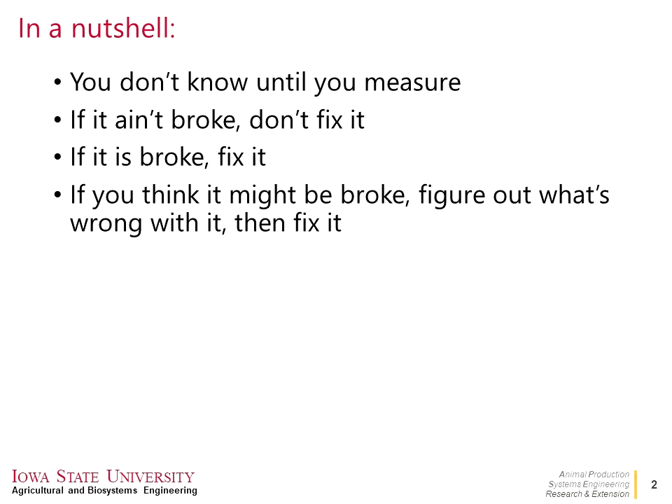So if you're in the barn and you're just kind of standing there, you're like, well, I can't quite tell what's wrong, I don't know, it might be this, it might be that. Well, get on the phone or message, whatever, and figure out, get the right people involved to really figure out what's going on. So this is what I'm really going to focus on right here.

This is for growers. So I say caretakers, people doing chores, people in the barn every day, and we're going to look specifically at practical solutions for the day-to-day problems that are in the barn. Sometimes there are day-to-day problems, and sometimes we never notice a problem for the 20-some-odd years the barn's in place.

So first we're going to really start with how to identify the problem. This is oftentimes a little bit complicated, but then again can be pretty easy. It's pretty obvious to know if your fan's not working, it could just be switched off at the wall, or it literally is broken. But sometimes those are hard problems to identify, and so this is going to aim to go through a little bit of the more complicated problems and how to solve them.

And then the next part we're going to get into is figuring out what are the solutions. Sometimes it is just replacing something, but then sometimes there's more complicated, bigger picture things that are going to take a little more troubleshooting, getting a few people involved to figure out what's wrong.

So why does ventilation in an indoor environment matter? It is probably one of the most critical aspects. It's usually never the sole problem of the system, but it affects just about everything. Thermal comfort, health - it's not going to probably cause pigs to get sick, but it's definitely going to make it worse, and it could also be used to make it better. It could be a stress, as it gets - what are we going to hit, a heat index about 105 down here in Ames this upcoming weekend?

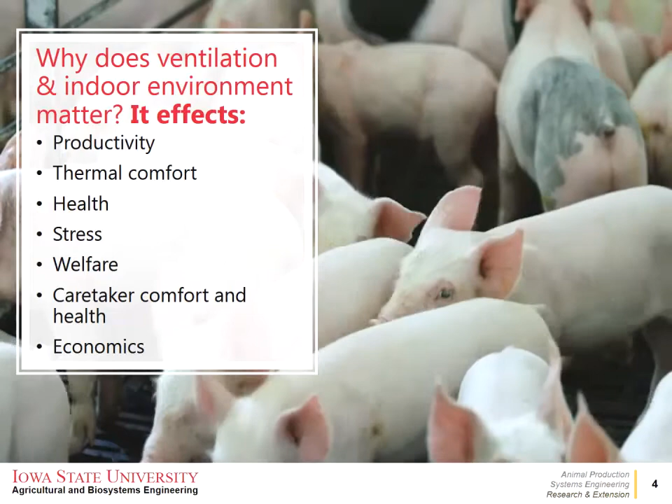That environmental stress becomes a welfare concern, and it's something we want to avoid. It also affects the people in the barn. So the caretaker itself is in the barn, and if it's a bad environment, it's going to be miserable for them. So all the more important to make sure the ventilation is doing what it's supposed to do. And most importantly for growers, it's economics, right? It's propane, it's electricity, it also comes back to productivity, but it's about economics. So it pays to have that ventilation system working correctly and doing what it's supposed to be doing.

So ventilation, what does it look like for most people? It's usually about this word cloud, right? It is just a massive jumble of words that we have heard. We don't know exactly what they always mean, but they're there, they do something for something that we need to make sure they're doing it correctly. But this is kind of the big ones - I just stole this off an article and put it in. This is what shakes out if you read a ventilation article. Not shockingly, ventilation's the biggest word in the article, but a lot of CFMs, pressures, insulation, pig, fan, heat, rate, exchange, facility, gas, shutter, cold barn, static. So it's just a big jumbled mess, and that's really what happens in a lot of people's minds. So what we want to do is clear this up, get simple, accurate definitions for these words so that people understand.

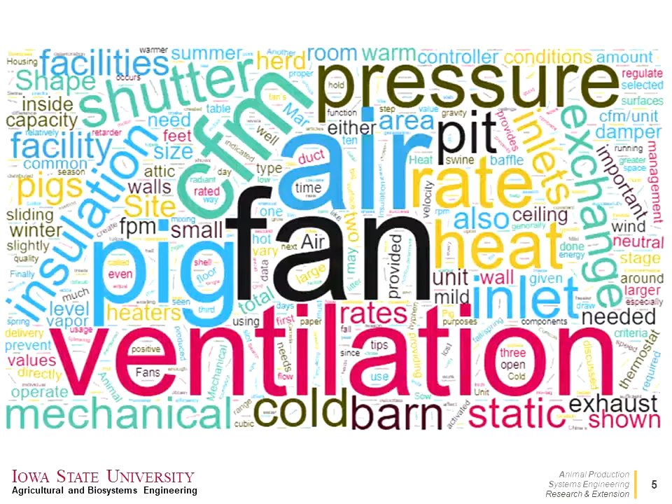So I'm going to introduce the 6 R's of ventilation success. This is the process I see as a methodology to make sure that the ventilation runs smoothly and our problems get fixed with the right solutions.

So the first one, if anybody could guess, is recognize. You got to be able to recognize the problem. That's where the training comes in. That's where coming to things like this, talking to your managers, territory managers, going to the trainings, understanding, taking notes, and really being able to recognize those problems when they come about.

Anybody guess what the next part is? Record, right? You got to make a note of it. If nobody knows or if it never gets written down, how's it ever going to get fixed? So record, write it down, make sure we take notes.

Next one, even though it's an old school telephone, report. You got to tell somebody. Somebody's got to find out. If you're not the one in charge of fixing it, how's it going to get fixed? Make sure you get on the horn, call somebody, and report that issue.

Next one is resolve. With resolve, this is actually making sure it gets done. If it's one of those more complicated problems, it has to get resolved correctly, in a timely manner, and figure out really what's the key underlying problem, and not putting Band-Aids on something that's much bigger.

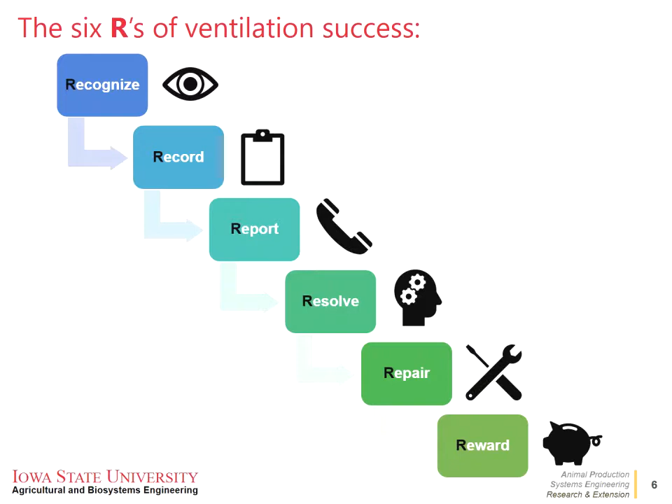Repair, get it done correctly, and then lastly is reward. Going back to what all the environment impacts - productivity, stress, welfare, economics - that's where the reward comes in. It's a big system that ventilation affects all of it. So by getting the process in place to make sure that the ventilation is working correctly, we can really reap the rewards in the system.

So let's go through the first part. Recognize. This is our critical first step. This is the one that requires our training and experience. If you see on the slide, does anybody recognize any issues?

Yeah, see some problems? Let's go through any problem where these are located. They look like a good spot. What's coming? What happens when that brooder's on? Where's all the heat going? Right up to those backup thermostats. So what they probably have done is probably adjusted them for that fact. But again, you got to see that that's a problem, not wondering why everything's being triggered.

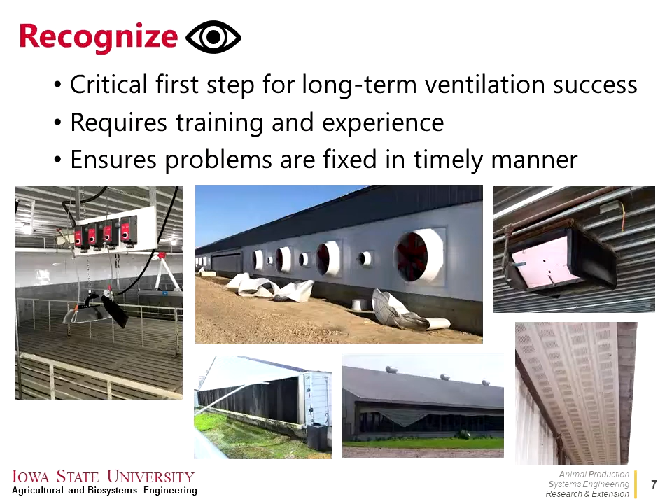Problem here, where's that feed line going? Right through a cool cell. Curtain sagging, are these the right soffits? If you don't know, you got to pay attention, look, and basically on the soffits there's just not enough open area to let air up into the attic. But you got to have the training and the understanding of what is supposed to be done to recognize some of these problems. So it's really starting with here.

How big are my pigs? What's it supposed to be doing? So if you don't have the concept of what my ventilation should be doing, how are you going to know if there's something wrong with it? So it's coming together and kind of putting together what you should be doing.

So I found this quote: you don't know what you don't know. That's where if you really don't know, have something or someone or something that does know. So checklists, standard operating procedures are good ways to just have something in the barn, accessible, that you can use, take with you, walk down the barn, pay attention to ventilation.

I said there might be an app. I don't know if there's a ventilation app yet. Maybe I need to make one. It'd be kind of neat. Just have something to help guide that troubleshooting, something that at least gets you pointed in the right direction quicker, so you can start working on those issues sooner. Those checklists are great. They really help get the season started. They help get through the season, help keep things running smoothly.

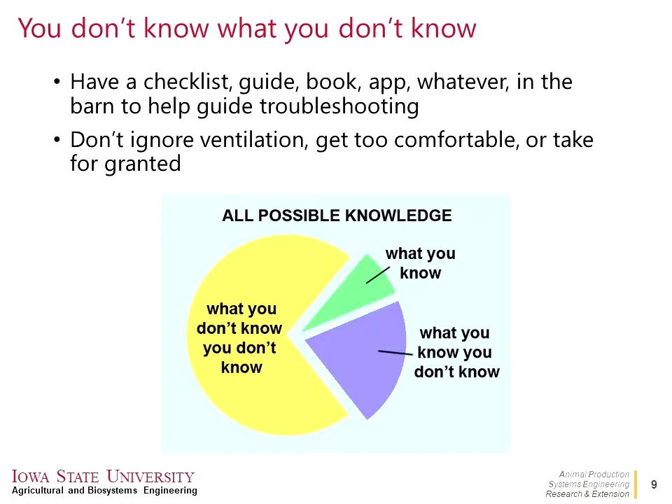So to start, this is kind of the very high-level approach to ventilation: what does it do, what should it do in winter. We have one major goal: remove extra moisture and noxious gases from the barn, generated from pigs, manure, and any combustion from unvented heaters. That's our goal for winter. You get that in your head, use that to start guiding any winter troubleshooting.

Opposite, like today, summer - our goal is generally to remove heat generated by the pigs to maintain a somewhat comfortable indoor temperature, and then we're also going to probably provide some elevated airspeed for cooling, depending on how the ventilation is.

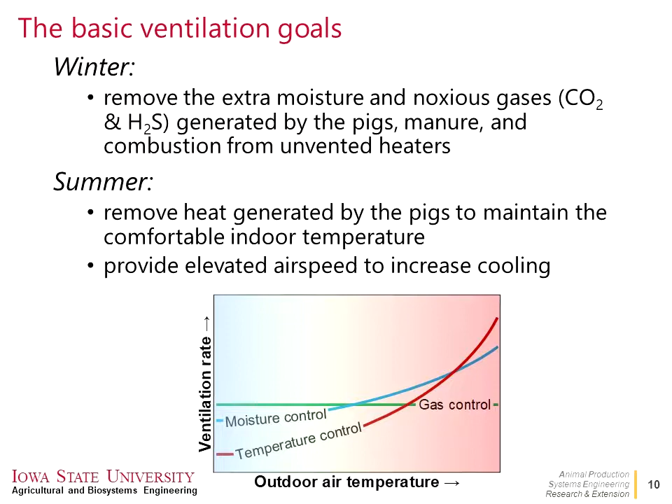So if you look at ventilation and how it goes through the different fan stages, we'll just take this as the rate. As that temperature goes up, we generally ventilate here for moisture. It's usually too expensive to ventilate for gases, and then as it gets warmer, we switch over and start ventilating for temperature. Just kind of the overall view.

So the other thing is separating out the difference between using the design and operation. We use our ventilation graph to size our fans and our number. We're after here to make sure we get everything in place so that when the seasons do come, we have the right amount of capacity to handle those seasons and get the exchange rate we need.

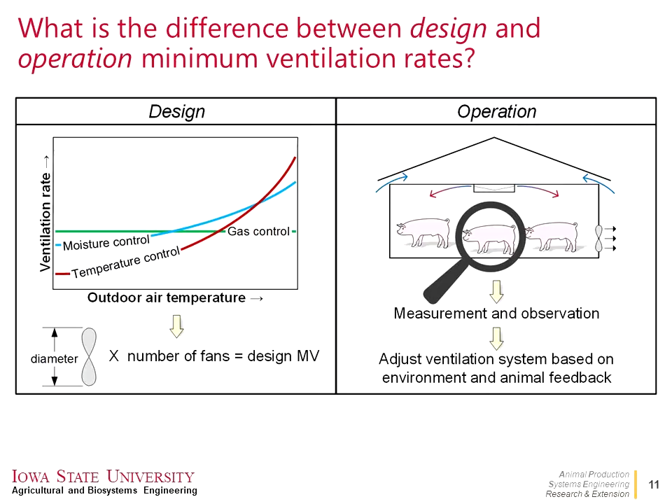Versus an operation, we're really looking at using the pigs and measurements in the barn to make sure we're doing the ventilation that we need. And we can make adjustments to the ventilation system depending on what we find in the barn.

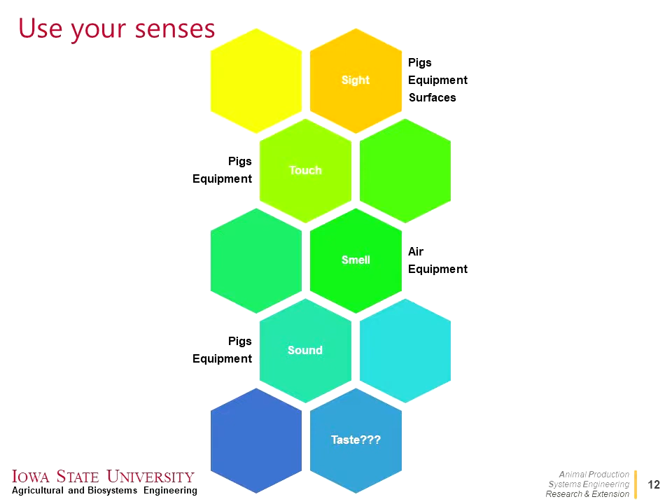So start with the very basic sensor. People are pretty easy sensors - it doesn't take any fancy technology. There's a lot of good that can come from just learning and the experience of using your 5 senses. Well, I got taste on there, but I don't know if I'd recommend licking anything in the barn, and I can't figure out how that relates back to ventilation. But the other ones - sight, touch, smell, and sound - can all be very useful tools to troubleshoot ventilation and figure out what's going on.

So sight, real simply, just look at the pigs. They're a great sensor, and that's where a lot of technology is trying to extract that information right out of the pig to help make our informed decision. As we don't have it yet, we still have our eyes that as we go through the barn, which is maybe only once or twice a day, but we can still use that information quite valuably.

So things like asking yourself, where's the dunging area? Is it in a normal spot? Has it changed? Trying to figure out what is their behavior.

So in times like this, looking at respiration rate, vices, seeing if they're huddling, or probably separating out now because they're getting too warm. So if you just look at behavior alone it can say a lot. In a chilled situation, they're going to start piling - pretty simple to tell that there's drafts, they're too cold, versus here they're too warm, they're trying to spread out. You can see pretty nicely where the brooder's at. Versus when they're comfortable, they're all kind of nice, evenly spaced, in that nice touching, not too close, not too far setup.

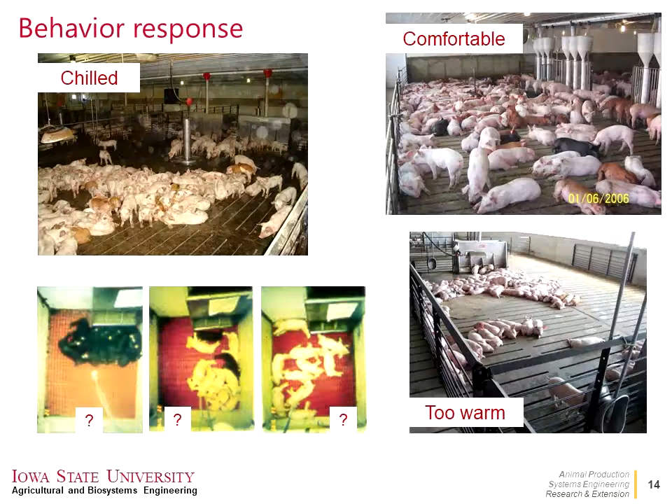So we know - too cold or too hot or comfortable? Too cold, right? What about this one? Too hot, right? So just simple, recognizing the pictures, and when you're looking at the pigs, being able to tell what their comfort is.

Go back to my slide. So equipment - also use your eyes to inspect the equipment. Are the shutters dirty? Is there any obvious issues? Can you see motors out of alignment? Is there noticeable tears, holes, gaps anywhere? Just taking an inspection of ventilation equipment and the pigs rather than just doing the chores. It really takes going through with a ventilation mindset rather than just, I got to get X amount of things done and not pay attention to the surrounding equipment.

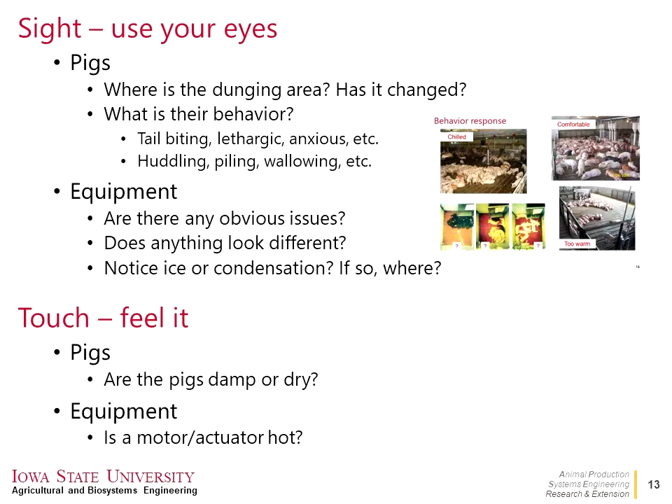So touch - I guess you can touch the pigs to feel if they're damp or dry. Touch motors if they're warm or hot. Just use your hands when you can to be safe about it, but use that to help diagnose.

Smell can be used to check air quality. Does the air smell gassy? Do I notice any air quality issues? Does it all of a sudden smell a little bit more like ammonia, if hopefully you're not desensitized yet? Same with equipment. Do you smell something burning when your fan's on? Is there too much dust? Is the belt worn? Just use the different senses.

Sound: listen for coughing. Are they making a lot of noise? Are they sounding extra anxious than normal? Same with equipment, grinding noises, just very simple things, but just knowing it and attributing it more to ventilation than all the other things going on in the barn.

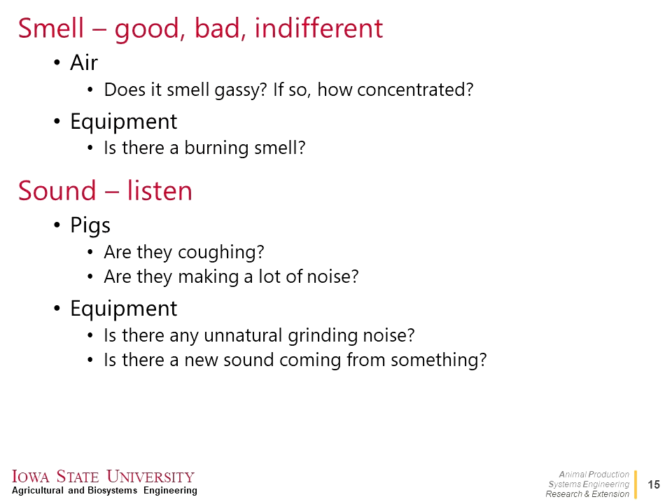So the next step: record. I don't have too much here, just make a note. It would be kind of interesting if they get into more electronic management, finding ways to track repairs, maintenance requests, etc. That way you can actually start to figure out timelines, how long it takes to get fixed, and whether the pigs are possibly not getting the best environment possible if that maintenance isn't recorded.

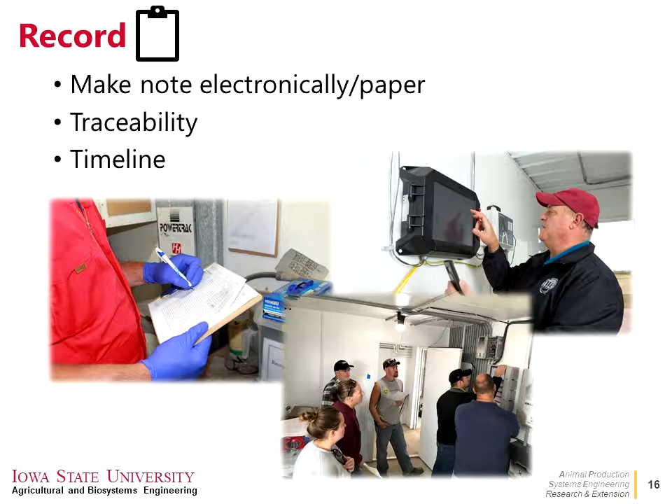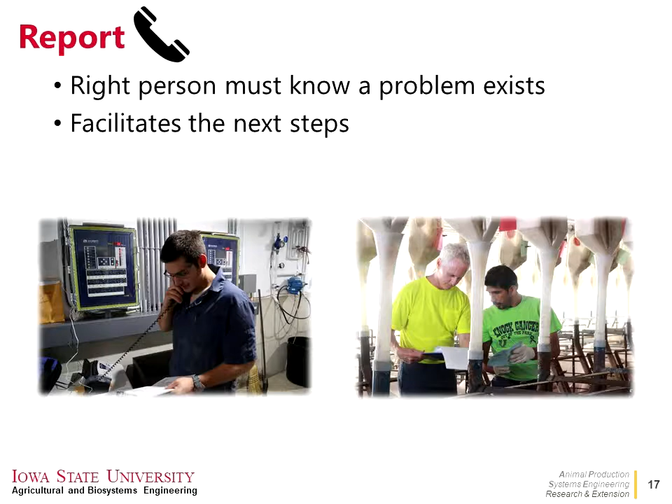Report: the right person must know the problem exists. Just telling your mom isn't going to get it fixed, right? You've got to tell the person who's going to be able to put in the right request, get in the barn, get the equipment ordered, and get things fixed. That really moves the process forward and gets the ball rolling.

So resolve, this one's a little trickier, may or may not be needed. If something just broke, fix it. But if it's something like just not getting the right airspeed at my inlet during the winter, it could be a whole host of other problems: fans, dirty fans, inadequate soffit area, etc. That's usually when you might have to call in other people. It's going to take some troubleshooting, might take some measurements, and get a few brains involved to figure out what's really going wrong and where we can start to fix the system or improve it.

Repair: get it fixed and get it fixed correctly, so not just swapping out for the cheapest motor, making sure it's the right motor that goes in. So if it was brand X at X horsepower, make sure that's the right one that goes back in. Or make sure you adjust your motor curve too when you do it. Paying attention to the repairs and making sure they're going in correctly, using proper techniques and making sure the right things get maintained well, is critical.

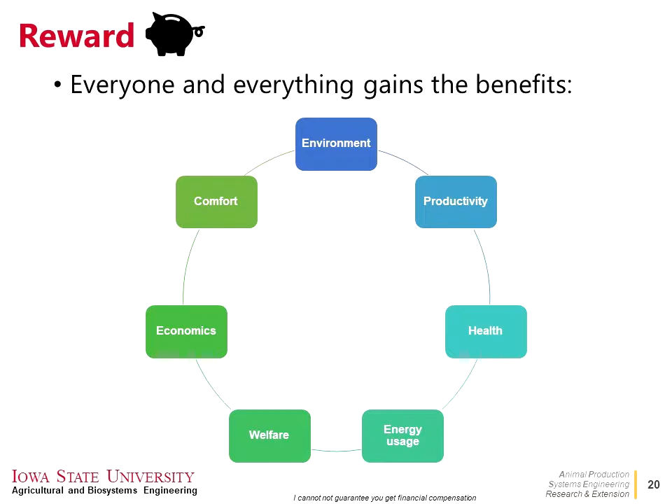Like I said, everybody gets the benefits. It kind of goes back to ventilation touching all aspects of the pigs in the house, from environment, productivity, health, energy usage, welfare, economics, and comfort. It's really hard to put a monetary value on how much a good ventilation system gets you, but I think we know how much a bad ventilation system costs. So it's important to make sure things keep moving smoothly.

Now we're going to focus a little more on specific examples of recognizing and resolving, because these are probably the two main ones we can use every day and actually get some things fixed or improved if we notice we're having problems.

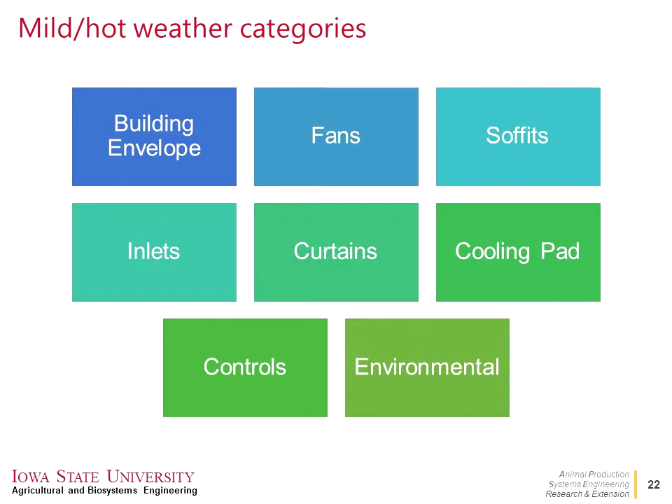I'm going to stick with mild to hot weather, not cold weather, since it's muggy and horrible outside. Here's the main categories if I'm trying to take a look at troubleshooting and improving ventilation: building envelope, fans, soffits, inlets, curtains, cooling pad, my control settings, and then the environment inside the barn — what is the actual environment and what are the pigs doing? These are the categories that would drive my troubleshooting and where my focus areas are going to start, so I want to go through some scenarios to figure out what's critical.

Let's start with a perfect example: my room is just too warm. Very basic — it's just too warm. Maybe it's 90 outside, but my room's 100. Hopefully not, but that's an extreme example. What is it outside? If it's really hot outside, your room's also going to be really hot unless you have a cool cell or something else for cooling. So it's not uncommon for rooms to be warmer — we usually hope to keep them no more than about 4 degrees Fahrenheit above outside. That's usually the guide we use.

Is there wind if you're in a natural barn? What's the air exchange? Going into the controller, do you have the right pig weight entered? If you're off by a couple hundred pounds, it's going to really change the set point. Are the temp sensors accurate and clean? Are they caked with dust and reading off? Have they been calibrated recently? Is there any other nuance — wrong brand used, or are they in the right spot?

If you have multiple in the room, are they all different? Do they vary within a reasonable amount, or are they similar? So for curtains, generally assuming a tunnel barn or natural barn, what are the air speeds at the curtain? What's the rope quality? Is it stretched, is it fraying, does it need to be replaced? Or are there any other issues with the curtain?

The other one is just fans. Can't harp on fans enough, as they're really the primary driver of ventilation. Dirty shutters can reduce airflow by about 20%, so just keep them clean. Wash them when you power wash, keep them dust free. As those things get weighed down, they just cannot move as much air. Especially in times like this, I think an extra 20% on a really hot day can really help some pigs.

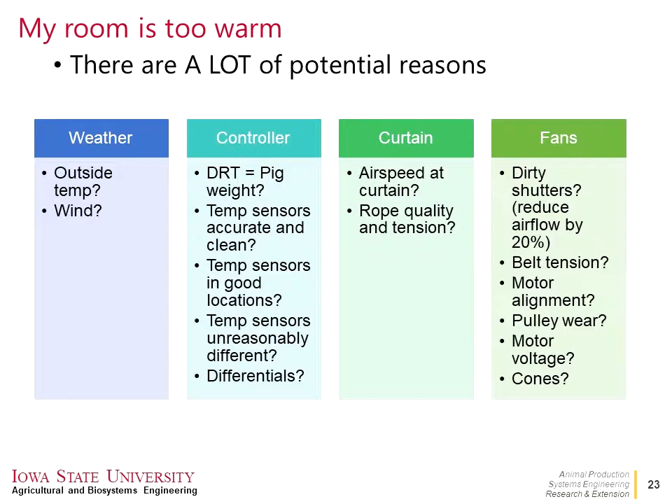Belt tensions, make sure they're kept tight, motor curves, alignments, pulley wear, etc. There's multiple things, but you've got to know that these are things you need to check. So again, having that checklist, having that guide - that's a lot of things to remember if you walk into a barn. So having something tangible and physical with you can really help guide some of this troubleshooting.

So as always, you've got to harp on static pressure and what it means for the ventilation system. It's the primary driver. Our fans pull air out of the building to create a negative pressure, and that's what drives air into the barn. So as pressure goes up, fan flow rate goes down. It's pretty simple, but that's what happens if your building's too choked - if you do the door slam test and that door slams, your pressure's too high, you're probably not getting enough exchange, leading to a warmer room.

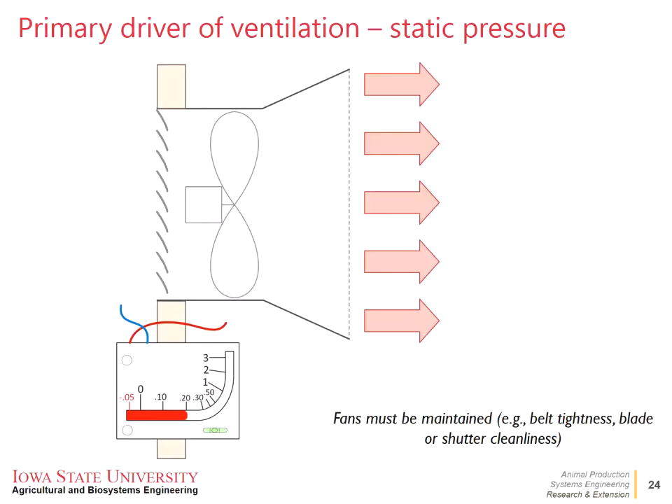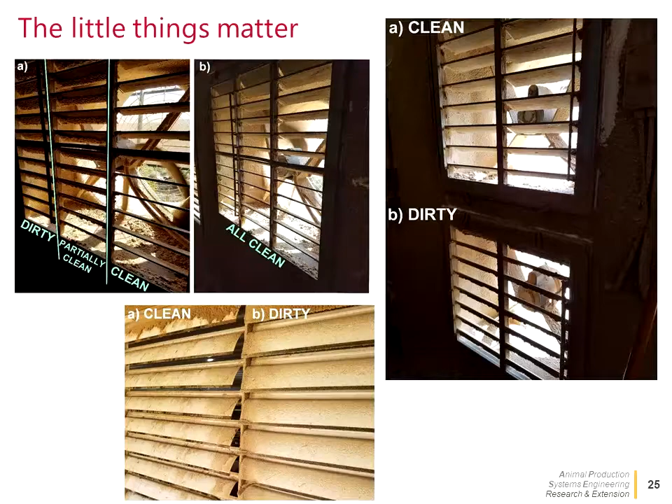But simply, that's it. Going into shutters, here's just some pictures I took when I was cleaning shutters one day. Just looking at how much - this is a really bad case, but it illustrates the point. It probably hadn't been cleaned, but here's a dirty shutter, a moderately cleaned one, and a clean one. You can just tell the difference in the opening and just how much extra weight some wet, dirty dirt sits on those shutters and weighs them down. They took those off, and it made a world of difference in the room. So you can take a slightly smaller fan and see the difference in how much they're open and how much air they're moving.

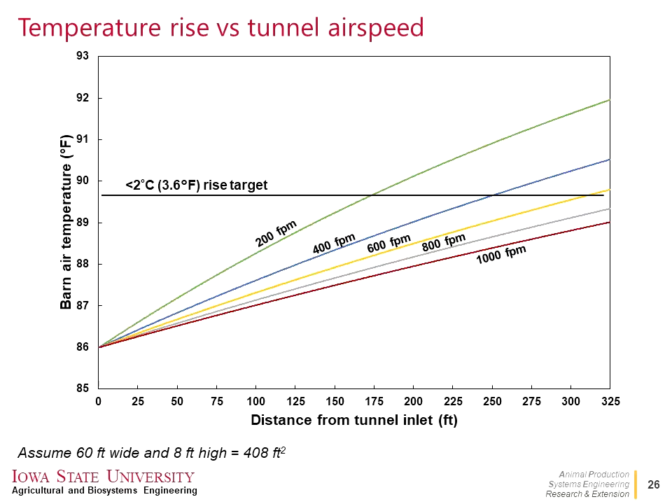So essentially, as the temperature goes up, we have more stages kicking in. Generally, if we're starting with ceiling inlets and then moving over to the tunnel curtain, the amount of actual airspeed inside the room isn't changing a whole lot, so it's kind of slowly going up. Then basically, as that temperature hits right around the skin temperature of the pig, they're going to start getting warmer. If the surrounding temperature is greater than the pig's temperature, heat actually starts to move into the pig. We always have to have a gradient from the pig temperature to the air temperature, or else we start going the wrong direction. So when it's 100 degrees outside, or 95 this weekend, we have to do something extra because it's warmer than the pig, and you're going to be driving heat the other way. So that's why we use sprinklers and other cooling methods to help keep the pigs cool.

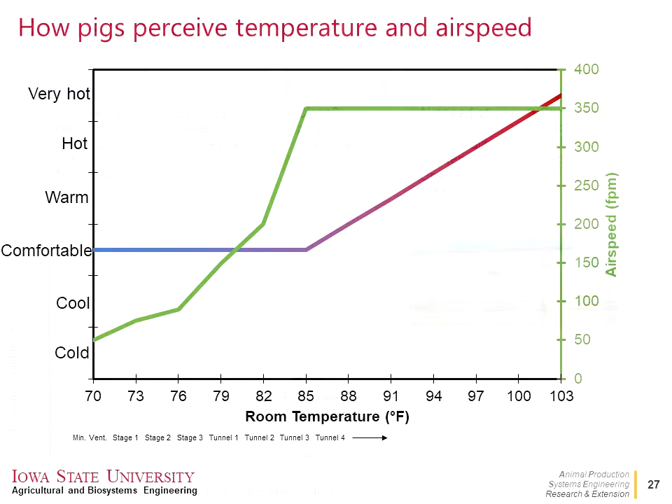Inlets—what is the airspeed? Are you out there with your Kestrel making the measurements you need to figure out your airspeed? Are you in that recommended range of about 800 to 1,000? You actually have to make the measurement. You can't just put your hand up there and feel it—you got to have something quantitative.

As the opening needs adjustment, are my settings correct? In my openings, infiltration—how well is my barn sealed? If we're pulling air through the gaps, it's not going through my inlet. That might be one reason. Are there noticeable gaps that can just be easily sealed up? Are doors left open? Are there holes? Just simple things to do to keep air going through the inlets.

Looking at airspeed at the curtain—as that curtain opens, is it following the correct airspeed? Is it too high, too low? What's the opening speed—are we opening it too quick, too slow? These are things to pay attention to. It's a little bit harder if you're sitting there just watching a curtain—it's probably like watching grass grow. So it might help to have some data or do some longer term measurements.

So for the curtain, what are the settings? Is it calibrated? Are we off at the opening, start, and end? Just things to go punch through on the controller.

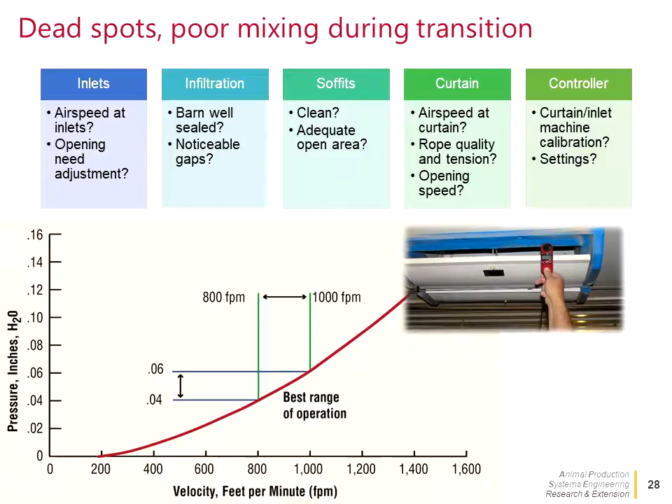The importance of fresh air distribution—we want to avoid dead spots or cold spots throughout the room. We want good mixing inside the room and to really get the fresh air delivered to where it needs to go. So proper placement and operation of ceiling inlets is critical, and we have to use static pressure to make sure we distribute that air correctly through the inlets.

So static pressure—now we're not talking across the fan, but across the inlet here. With no static pressure across that inlet, that air jet just drops, especially when it's really cold outside. Versus when we have enough static pressure, we can keep that 800 to 1,000 feet per minute at the inlet and get the nice jet mixing that we desire.

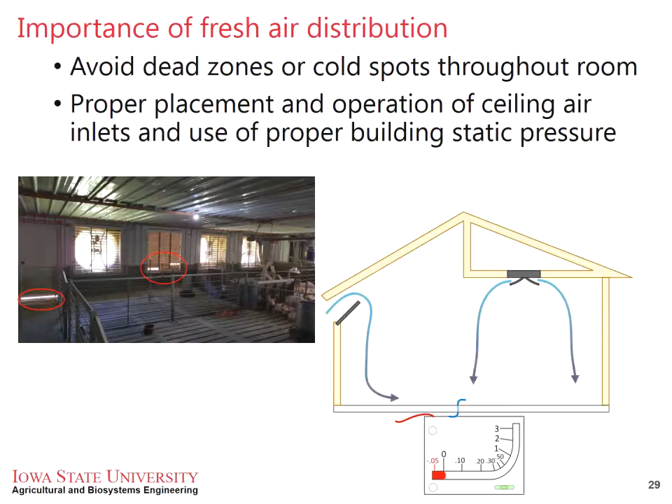Insufficient—cold air drops, and we get secondary rotary mixing there, which is just that stale air. As you walk across the pens, you start to see, oh, this was really nice, and then you can tell how stale it gets as you get closer to the wall.

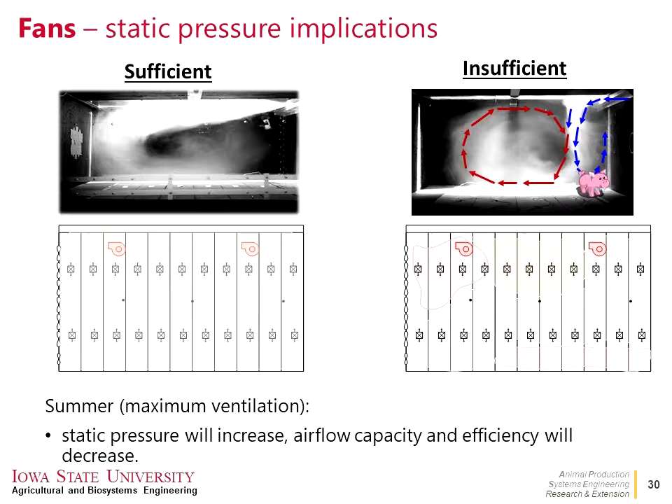Versus in summer, the other thing we got to think about is if static pressure increases across the room, as I mentioned before, fan capacity goes down, and we're losing our CFMs.

I'll switch over to cool cells just in case there's some people with sow farms, just to briefly chat about it. Weather—what's the outside temperature and humidity or dew point? Especially with some coming up this weekend, I think it's probably going to be like 90, heat index at 105, so maybe 95 and 80% RH or something. Your cool cell's probably not going to be doing a whole lot if you're here in Central Iowa. That's probably one to consider whether you want to operate it or not this weekend.

The controller—what's the on-temp for that cool cell? Are those temp sensors accurate? Where are you measuring to make the decision to turn on the cool cell? Are they in good locations? Are they reasonable? Again, it goes back to calibration, cleanliness, placement—making sure your sensors are in the right spot.

Pad—is it streaking, getting water distribution? Are holes plugged? Is the pump working? Is the pump clean? Has anybody looked at the strainer? What's my water pressure—is it too high, too low?

A lot more questions come in if you have a cool cell, because you've got cool cell plus everything else I just talked about. So it really adds another level. But again, to keep things working smoothly, you've got to have all these things incorporated.

Fans are the same as if you were in any other type of barn. They've just got to be clean, belt tight, cones working, voltages correct, and making sure things are right.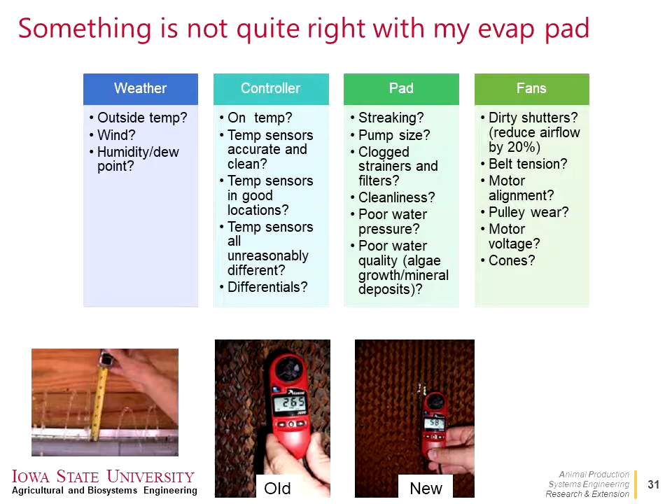It's just so restrictive, you can't pull much air through, versus a nice clean pad being able to really move some air. So with that, let's wrap up with the key take-home points.

The key is really gaining experience and starting the training to develop better recognition. If you don't have the recognition, then the barn's perfect, right? So until you notice something, that's where everything starts. Or if you're too well trained, you notice everything, and then you're kind of burning yourself out.

Go through the checklists. They are important. They've been really perfected over the years by a lot of people. They have some good stuff that you just need to have with you. Don't try to remember like, 'oh, I saw that in a presentation a few years ago.' Have it there with you, you can print them out and just have them.

Perform routine maintenance. This is another critical one. Just do the stuff every day that needs to be done. Don't put it off, don't wait till the last minute to do something. Make sure things are done in a timely manner and kept maintained.

Then going back to that, the whole big sphere of ventilation, there's all these things to do, especially if you're a caretaker. I set aside a little bit of time for ventilation and take one pass through the barn focusing on just that, to make sure you're getting what you need and it's doing what it's supposed to do. And always use the pigs to help guide your feedback.

So with that, I'll take any questions.

Any recommendation for today's faster growing pig on a CFM per head? More than what it was years ago - more than what it was in the Midwest Plan Service 1985. What's the current one, like 110 or 120 on a tunnel barn? I don't know, I've been finishing at 120. That's not tunnel - right, tunnel. Tunnel turns out to be more like 200 to 250 CFM per pig, depending on barn dimensions.